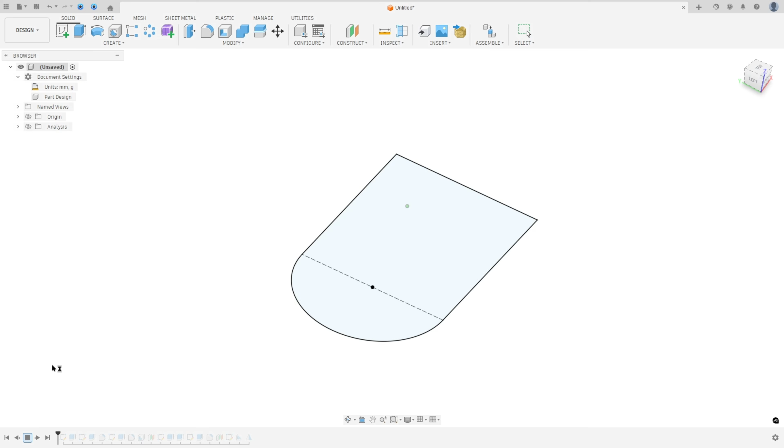Let's try a new challenge in Autodesk Fusion. In this video, you'll learn to use the Extrude, Fillet, Shell, Offset Plane, Rib, and Mirror. So open Fusion and let's go.

The first step to create this part, we will select the top plane and make this sketch, with the midpoint here. First we'll create a rectangle. The distance between this line and this line is 72 millimeters. Then we'll create this arc, with the midpoint in the center of this line. The distance between this line and the tangent point of this arc is 120 millimeters.

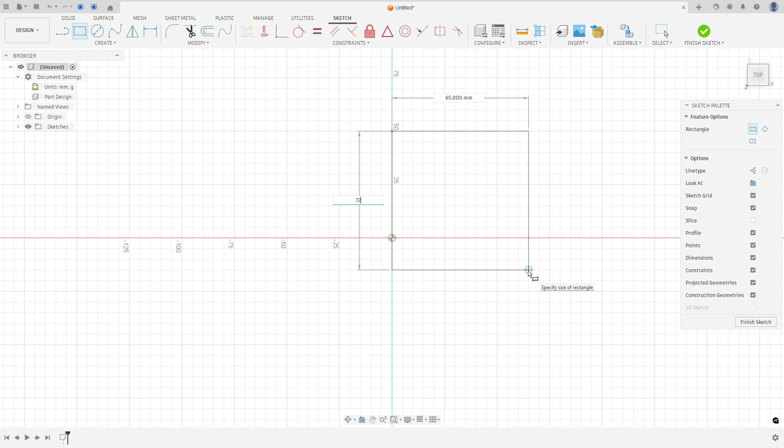So open Fusion, go to create a sketch, select the top plane, select the 2-point rectangle, and make a rectangle here with a distance of 72 millimeters. Go to constraint, select the midpoint, select this line and this point here. Now go to arc, center point arc, click on this point and click on this point, making an arc here.

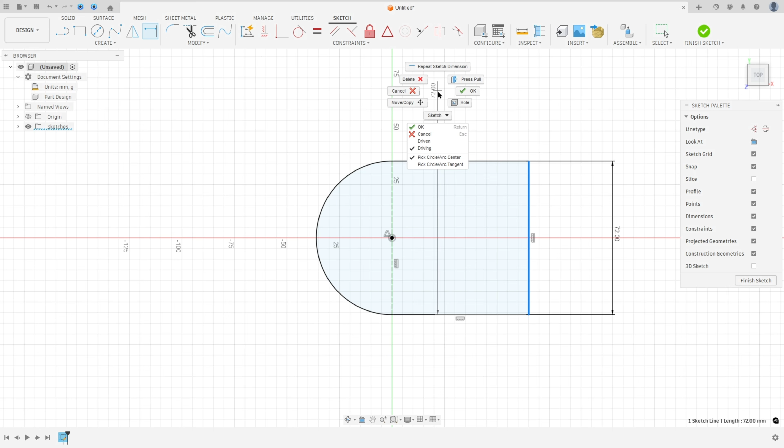Make this line here a construction line type. Go to sketch dimension, click on this line, right-click and select pick circle, arc tangent, and select this point. The distance here is 120 millimeters. Now finish the sketch.

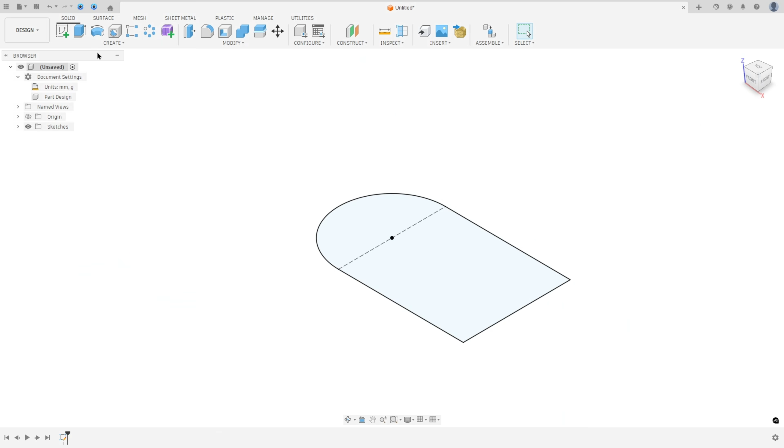We will extrude this 45 millimeters. So go to extrude, select this profile, 45 millimeters, operation new body, and press OK.

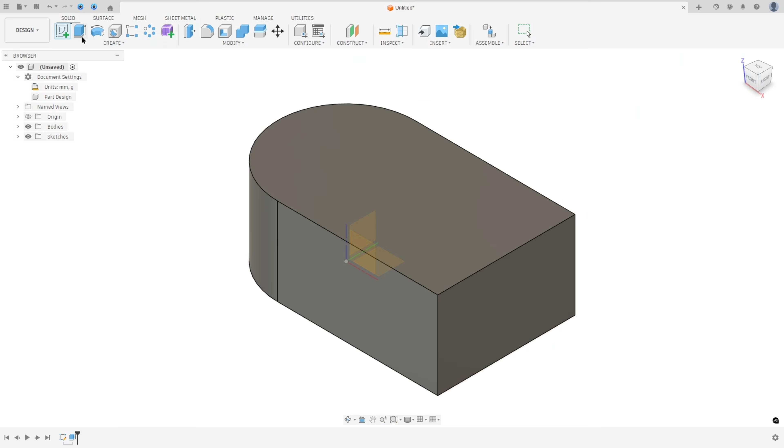Now we will create this cut here. We have an arc with 30 millimeters of radius, and this arc is tangent on both sides. So go to create a sketch and select this face, press letter P on the keyboard. Specified entities, select this face and press OK. Now go to create, select the arc, 3-point arc.

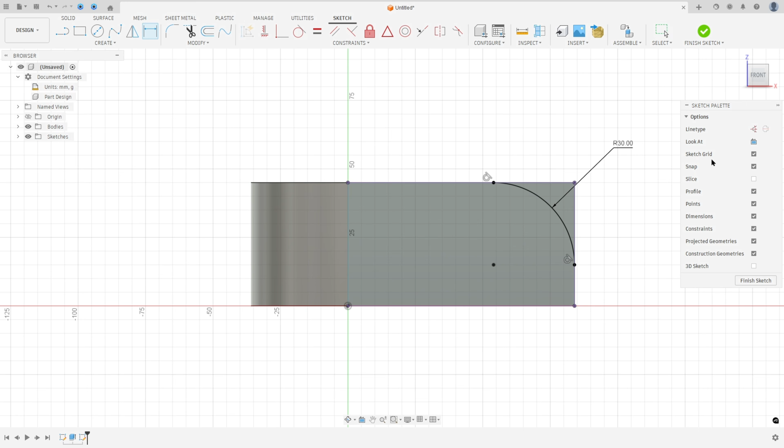Click on this line and this line here to make an arc. Go to constraint, select tangent, select this arc and this line, then this arc and this line, making this arc tangent on both sides. Go to sketch dimension, the radius here is 30 millimeters. So we created this profile, finish the sketch. Go to extrude, the extent type select all, flip the direction, the operation here is cut, and press OK.

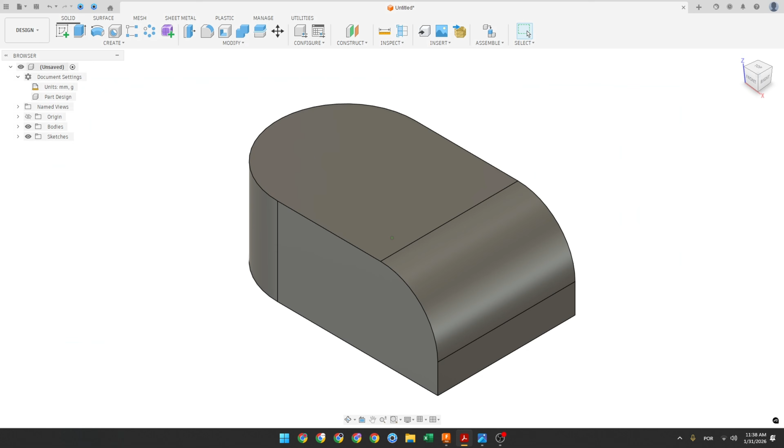Now we will create this fillet here. The radius here is 8 millimeters. So go to fillet, select this edge, 8 millimeters, and press OK.

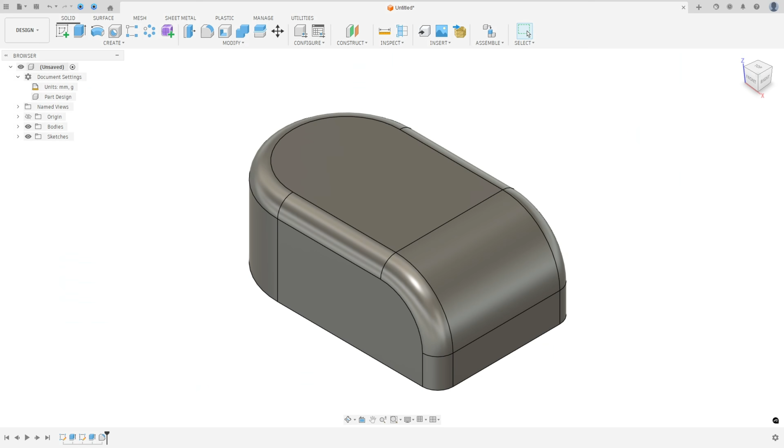Now we will create this cylinder here, in the center. The cylinder has 36 millimeters of diameter, and we need to extrude this 8 millimeters from this face. It is in the center, at the midpoint. So go to create a sketch, select this face, select the circle, click on the midpoint, make a circle with 36 millimeters of diameter, and finish the sketch. Go to extrude, select this profile, 8 millimeters, operation join, and press OK.

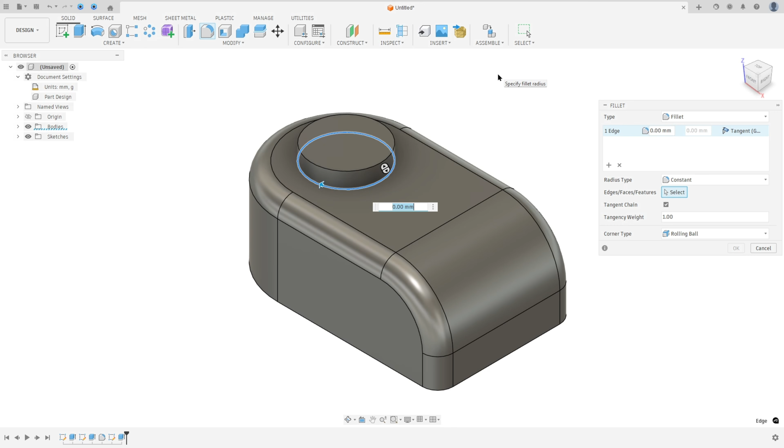And now we have a fillet here on this edge with 5 millimeters of radius. So go to modify, select fillet, select this edge, the distance here 5 millimeters, and press OK.

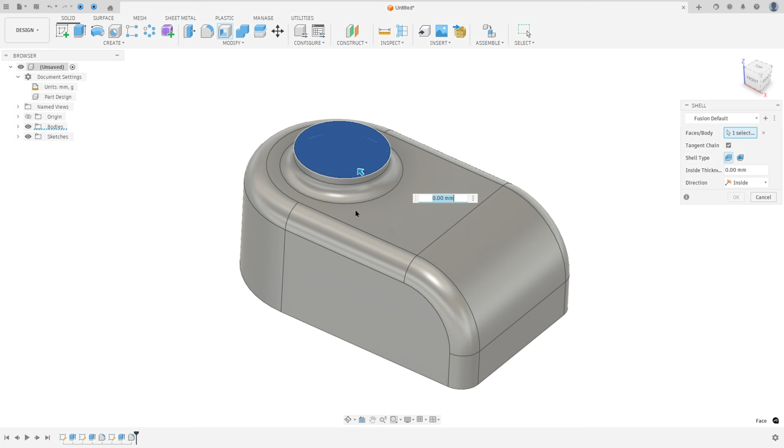Now we will shell this body, and the thickness of this body is 2 millimeters. The face that we will remove is this face here and the bottom face. So go to modify, select shell, select this face and this face here, thickness 2 millimeters, and press OK. Let me show you here. We made this one.

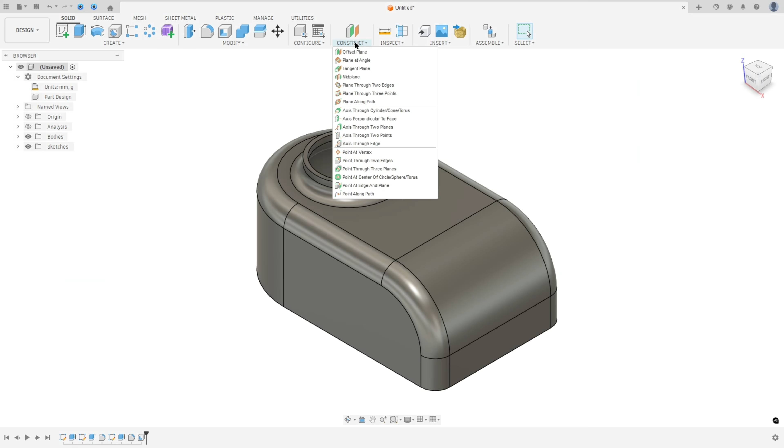Now we will create this cylinder here. Let me remove some lines here. We will create this cylinder. So we will create an offset plane, and the distance between this plane and the top plane is 60 millimeters. So go to construct offset plane, select the top plane, the distance 60 millimeters, and press OK. Go to create a sketch, select this new plane.

Here we will create this circle with 24 millimeters of diameter, and the thickness here is 4 millimeters. So we will create another circle, and the distance between these two circles is 4 millimeters. Go to create, select the circle, and make a circle here with 24 millimeters.

Create another circle here, concentric, and go to sketch dimension: the distance between these two circles is 4 millimeters. The center of the circle is vertical with this point, and the distance between this point and this edge is 16 millimeters. Press letter P on the keyboard, select this edge, and press OK.

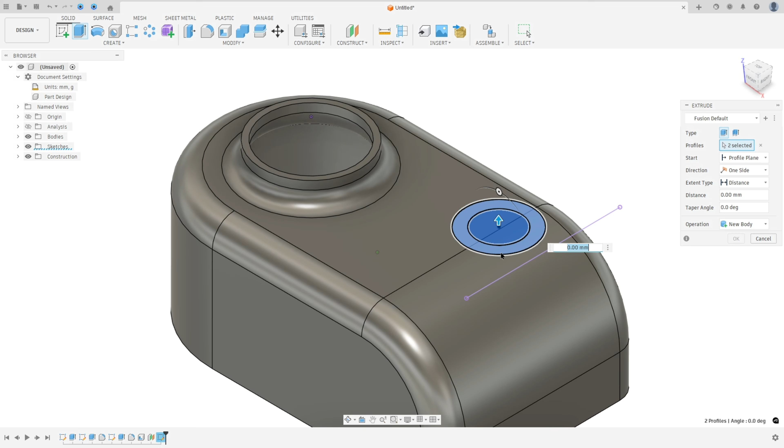Go to sketch dimension, set the distance here to 16 millimeters, and go to constraint, select horizontal vertical, select this point and the midpoint, then finish the sketch. Go to extrude, select this profile and the direction one side, the extent type select to object, and select this face here, operation join, and press OK.

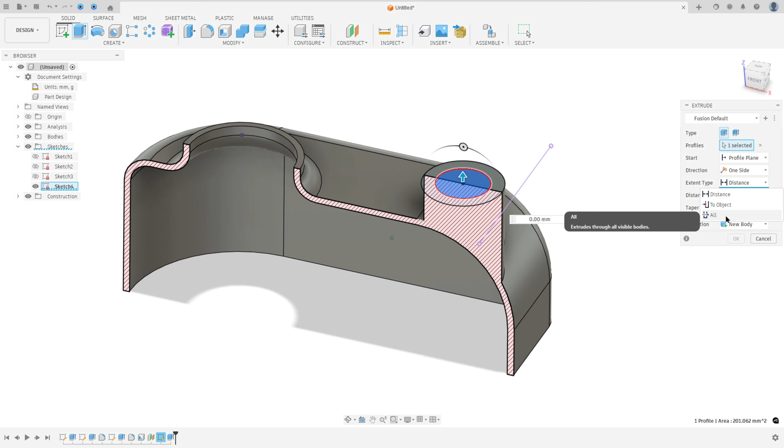Now we'll make a cut here. Show sketch 4 again and go to extrude, select this circle and the extent type select all, flip the direction, operation cut, and press OK. I will hide this sketch.

Now we will create the base. So for the base, we will select the top plane and make a project of sketch 1, and then we will make an offset with 5 millimeters of distance.

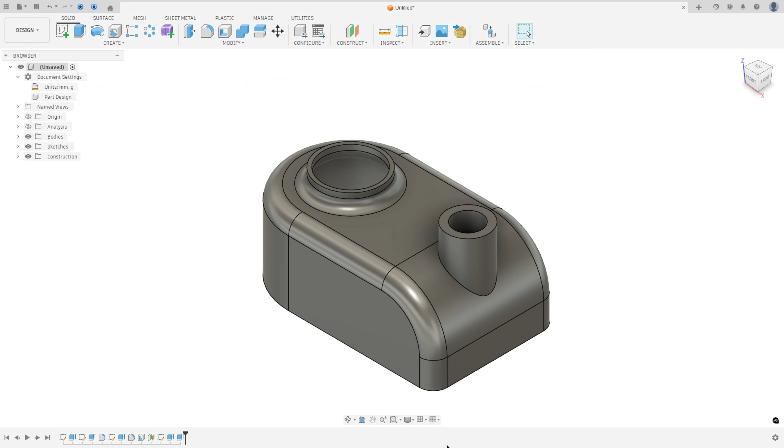Go to create a sketch and select the top plane, press letter P, and in the selection filter, select body, select this body, and press OK. I will hide this body a little bit and go to offset, select this line here, set the distance to 5 millimeters, and press OK.

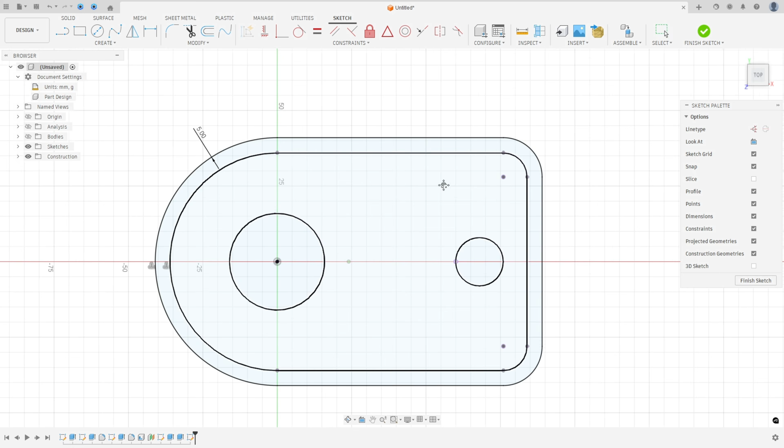Now we will create this rectangle here on this side and on this side here. This line here is horizontal, vertical with this one, and this line here with this point here. The distance between this line and this one is 120 millimeters.

So select line, make this sketch here, and make the same here.

Go to constraint, select horizontal, vertical, select this point and the midpoint, this point here and the midpoint. And here we need to find the center of the circle.

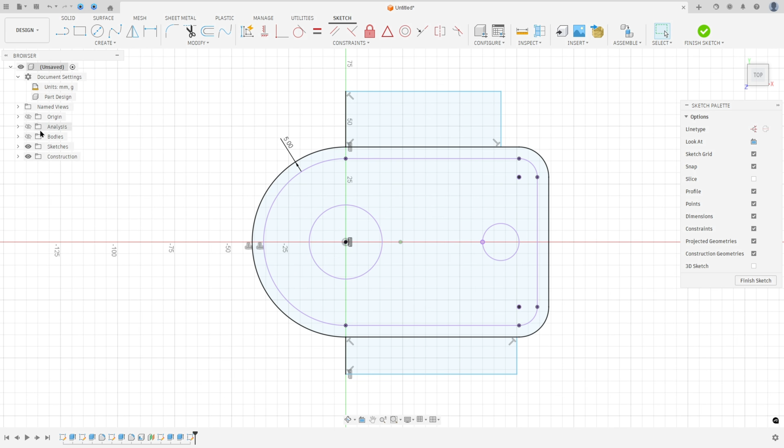Show sketch 1 here - sorry, show sketch 4. Press letter P on the keyboard, in the selection filter select specified entities, select this point here, and press OK.

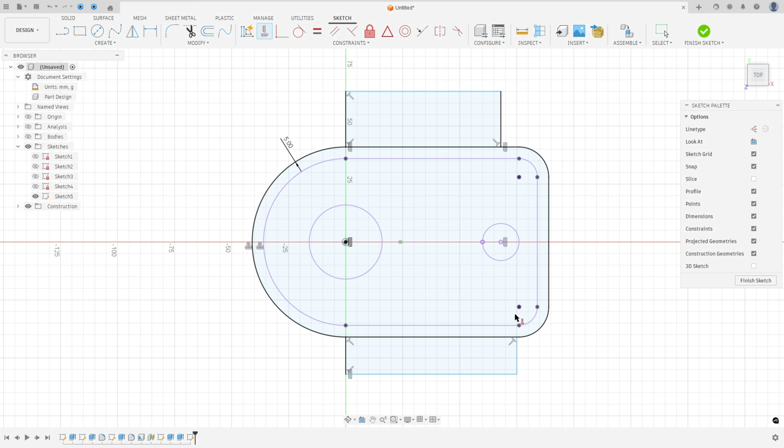Hide sketch 4 and go to constraint, select horizontal, vertical, select this point and the center of the circle, this point and the center of the circle.

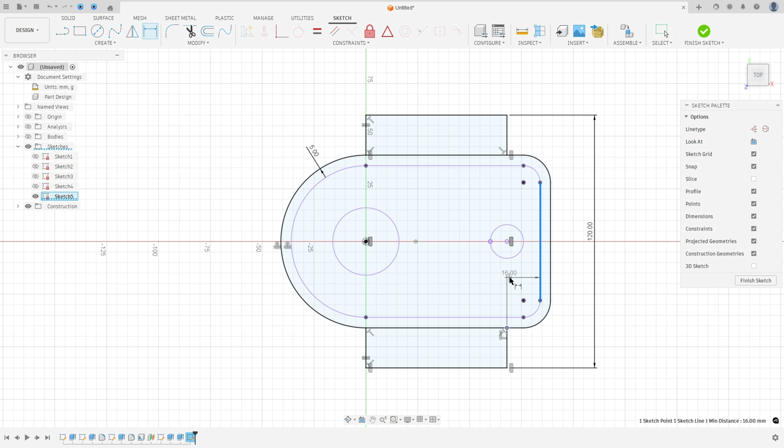Go to constraint, select equal, select this line and this one, and go to sketch dimension: the distance between these two lines here is 120 millimeters. And here, just to check the dimension, the distance between this line and this one is 16 millimeters, okay? So just go to dimension, just to check this dimension, select this line and this one.

Now we will create this rib here. The thickness of this rib is 4 millimeters, and the distance between this face of the rib and the midpoint is 32. So we will create a new plane here with 32 millimeters of distance.

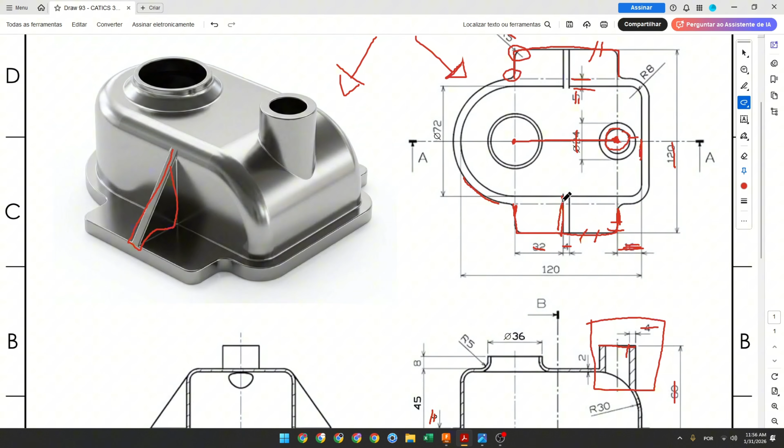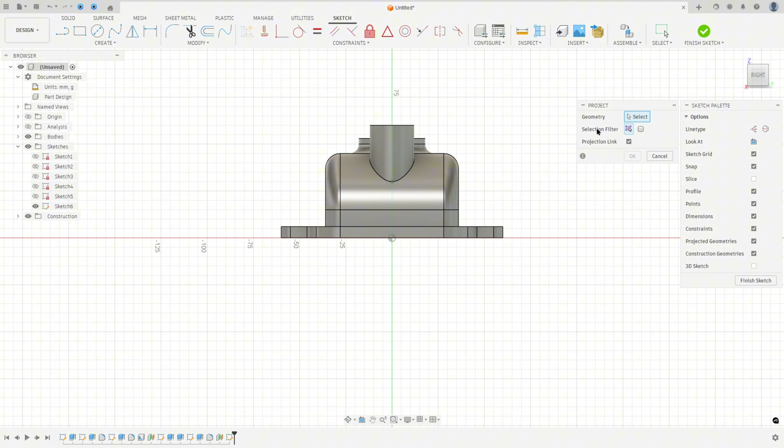Go to construct, offset plane, select the right plane, set the distance to 32 millimeters, and press OK. Go to create a sketch, select this new plane, press letter P on the keyboard, in the selection filter select body, select this body, and press OK.

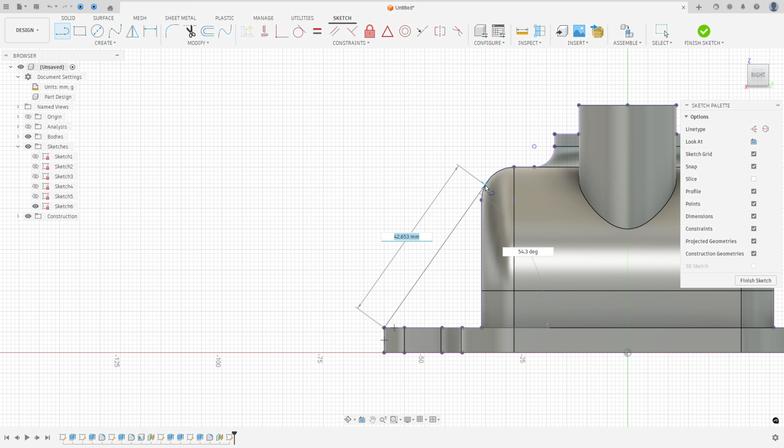Here we will create this line from this edge, and it will be tangent with the fillet here, with this face here. So select line, click here at this point, and make a tangent line here. When you see the symbol, it means it is tangent. And finish the sketch.

Go to create, select the rib. For the profile, select this line here, and the thickness here is 4 millimeters.

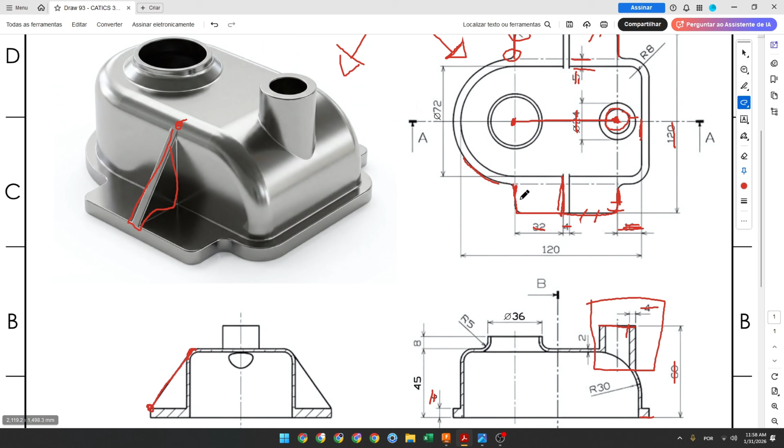But for the thickness direction, select one side, so it will be to this side here. The distance here is 32, 32, and 4 to this side of the plane. And press OK.

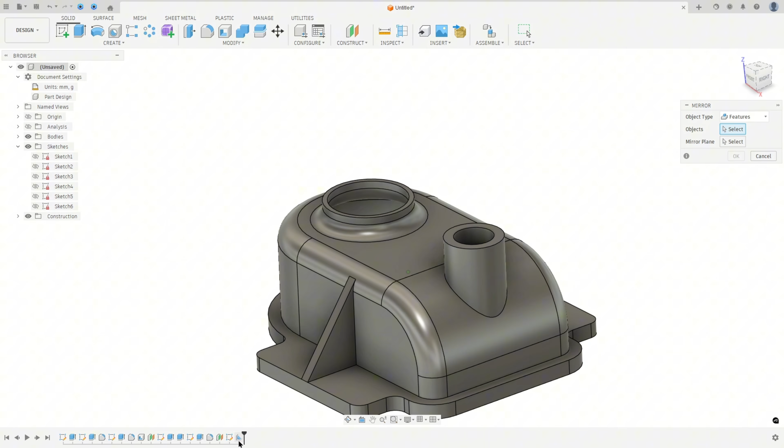Now we need to create the same thing on the other side. So go to create, select mirror, and for the object type, change it to features, and for the object select the rib. For the mirror plane, select the front plane, and press OK.

And here we finish our exercise.